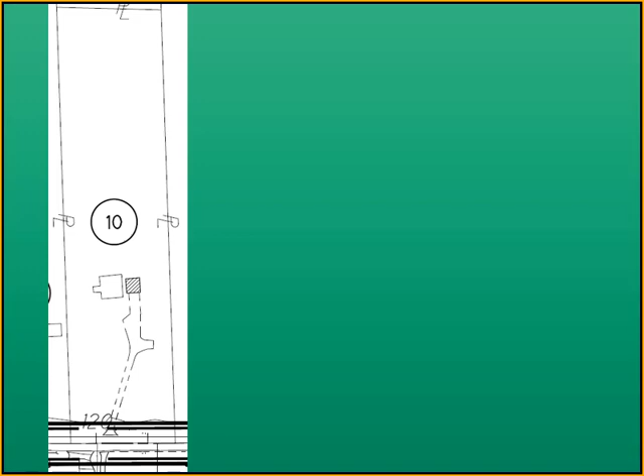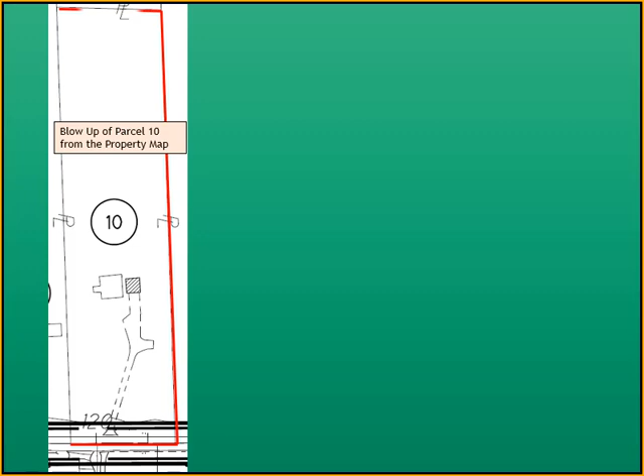What we're looking at right now is from the property map, and it's a blow up of parcel 10. I've just drawn a red arrow, and that shows that the Riebe's property extends into the middle of State Route 87. The red lines outline the remaining rest of the Riebe property.

I've just inserted a yellow highlighted area, which is detailing the SH taking and the T taking from the Riebe property.

So now we're going to illustrate the SH and T take areas because it's difficult to see on the blow up.

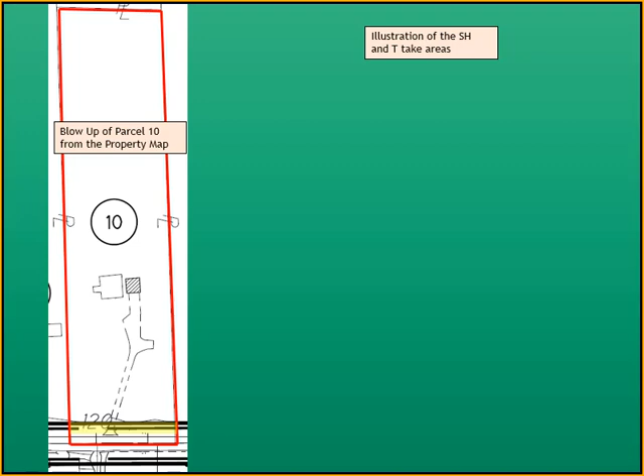Again, this red line that you see in this orange area is the property lines for the Riebe property. The center line of State Route 87 is the border of the Riebe property.

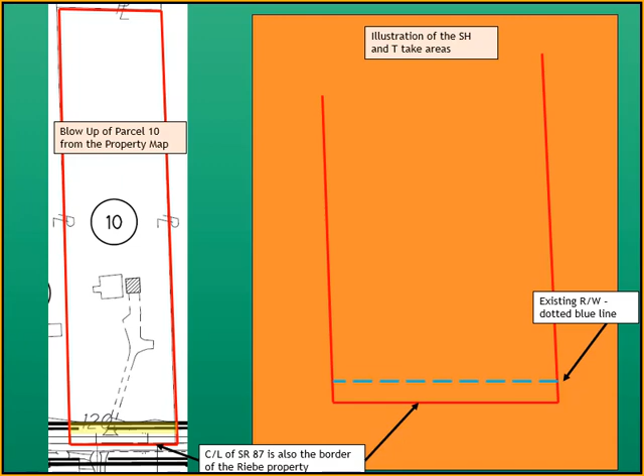The existing right-of-way is shown by dotted blue lines right here. And so the existing right-of-way is also PRO. That PRO goes from the center of State Route 87, which is owned in part by the Riebes, and it stops where the existing right-of-way line is, shown by the blue line. That is existing PRO, existing right-of-way.

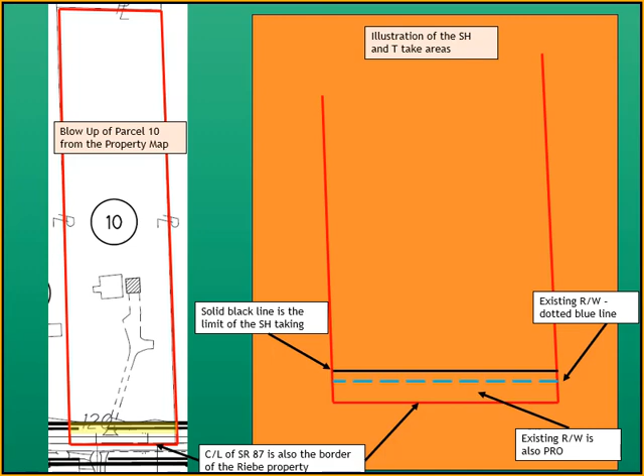Solid black line is going to be the limit of the new SH taking. And the T, I'm drawing in the T taking right now. It's an irregular shaped line, and that is the limit of the T taking.

So let's get into the detail sheets from the right-of-way plans. The detail sheet provides enough information for an appraisal. It also serves to document exactly what area is acquired, and many of the items shown in the right-of-way detail sheets are construction items.

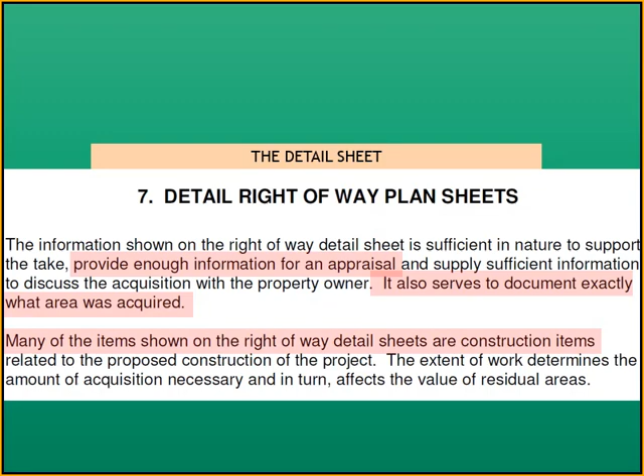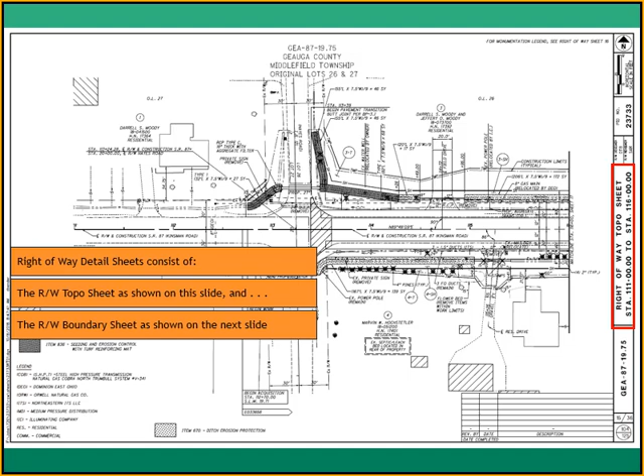So in front of you is a detail sheet. Right-of-way detail sheets consist of the right-of-way topo sheet, which is shown on this slide, and the right-of-way boundary sheet, which is going to be shown on the next slide.

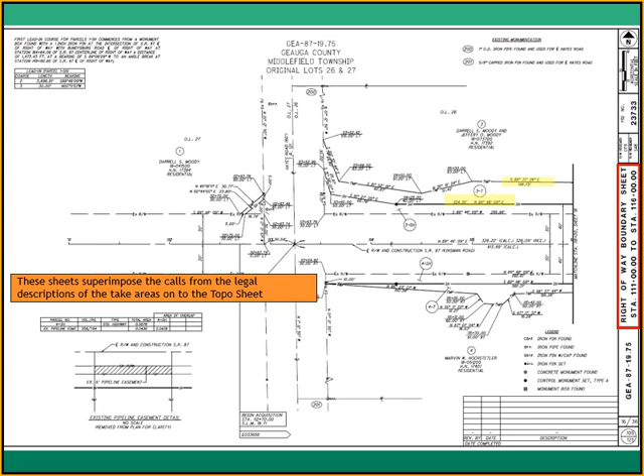And here's the right-of-way boundary sheet. These sheets superimpose the calls from the legal descriptions of the take areas onto the topo sheet. So outlined in yellow are the various legal calls for this particular parcel.

So now let's take a more detailed look at the detail sheets for parcel 10 on the next few slides. We're going to interpret a detail sheet. Here's a blow up of that detail sheet.

Outlined in red squares are property lines which go to the center of State Route 87. So the Rybys, we've just outlined parcel 10. We're going to go down State Route 87. Here's another property line.

And that's across the street from Rybys is parcel 11. There's another property line; we've just outlined that property line, and that's owned parcel 12. Here's another property line; outlined that, and that's owned by parcel 14. To the north is a larger parcel, parcel 13.

So what we're drawing in now is the existing right-of-way line, outlined in a brown square. We're going to draw those in with a dotted red line. And then below, we are now drawing in the existing right-of-way lines. We're putting in a red dotted line to represent where the limits of the existing right-of-way lines are. And that yellow highlighted area is the limit of the existing right-of-way for State Route 87 in the vicinity of the Riebe property. That is PRO.

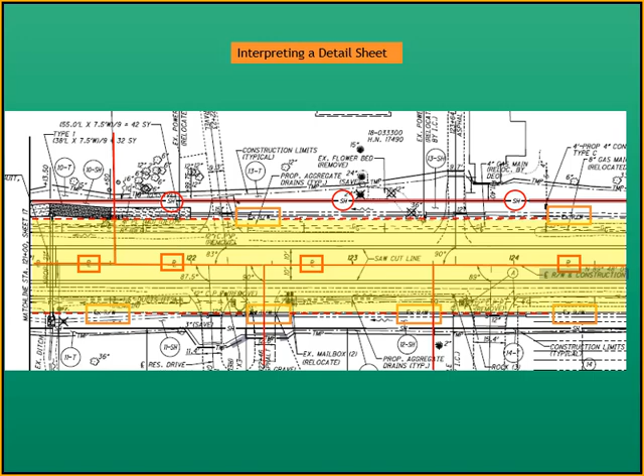Now we're drawing in circles that are designating where the new SH taking line is. Notice it's a solid black line to the upper part of your screen. We're going to draw those in a pink color. So that is the limit of the SH taking that goes from the limit of the existing right-of-way, shown by a dotted red line, going up to a solid black line outlined in pink. That will be the limit of your new SH taking.

We're now going to go to the bottom of the screen, show the limits of the new SH taking, also outlined in pink.

So now we're going to go to the top of the screen. In circles, we're going to outline the limits of the T take areas. So those are showing the T take areas outlined in a black circle. And now we're going to outline those in a gray color.

So the T takings occur behind the new SH taking. Those T takings are needed for construction purposes associated with the highway. Those T takings will expire at the end of the project. Those T takings are for 12 months based on the right-of-way plans. We're now going to go to the bottom of the screen, outline the T take areas.

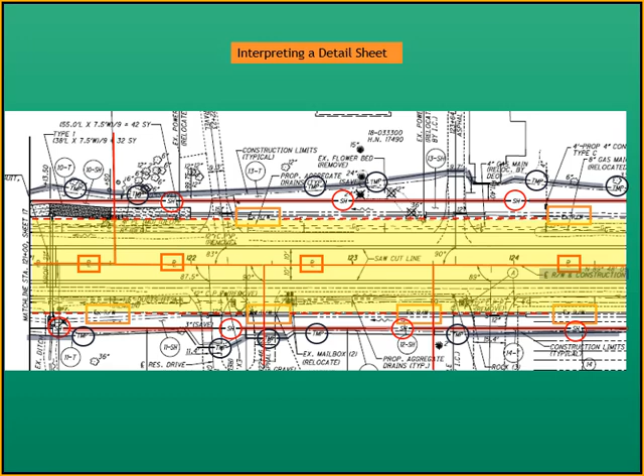And we're going to highlight those with a gray highlight. All right, next slide. We're going to look at the detail sheet having parcel number 10. There's parcel 10 in a blue highlight to the right of your screen.

Here is the property line for the Riebe property going to the center of the road, but it doesn't show the entirety of Riebe property because there's a match sheet.

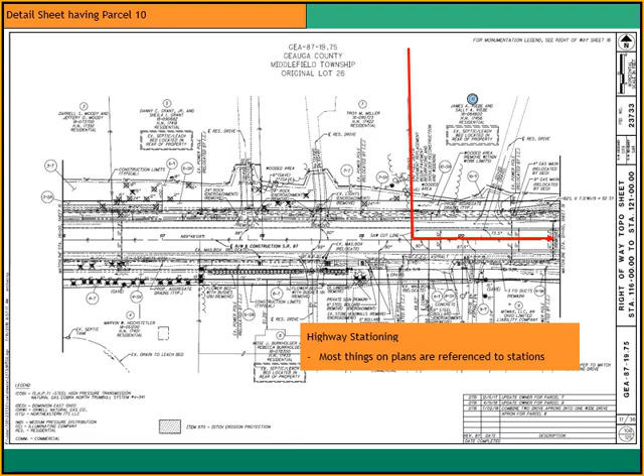Highway stationing, you need to be aware of. Most things on our highway plans are referenced to highway stations. So outlined in a brown square is a highway station. In this case, it's 117. Going up station is 118, 119, 120, which happens to be in front of the Riebe property. These stations are 100 feet apart.

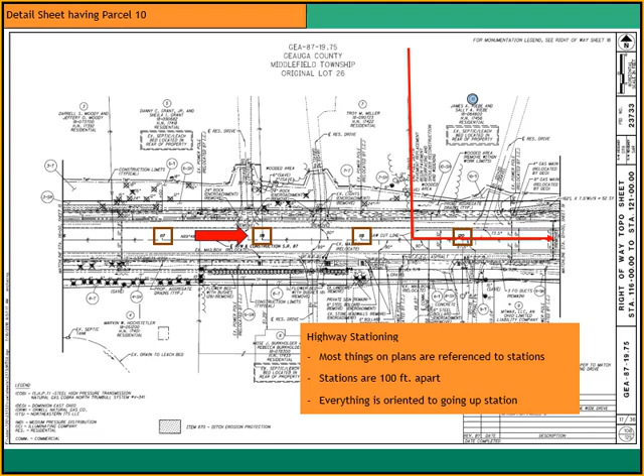Everything is oriented to going up station. So from station 117 to station 118, that is going up station, shown by the red arrow. To the left is going to be station left. To the right will be station right. And the arrow going to the left is going to be known as down station.

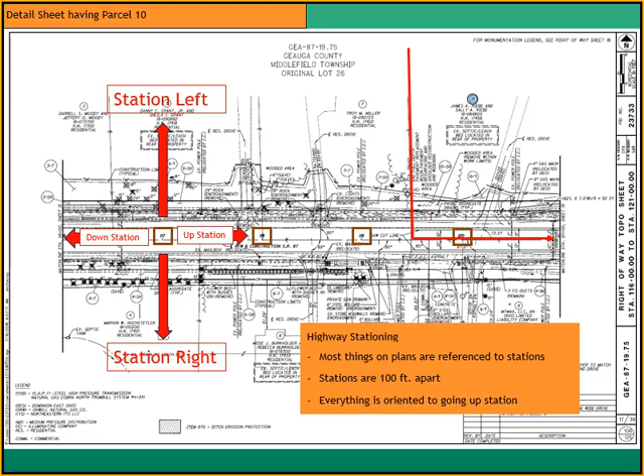And outlined in red is the match line to show the entirety of parcel 10. We've just outlined parcel 10-SH, which is the SH taking, and parcel 10T, which is the T taking.

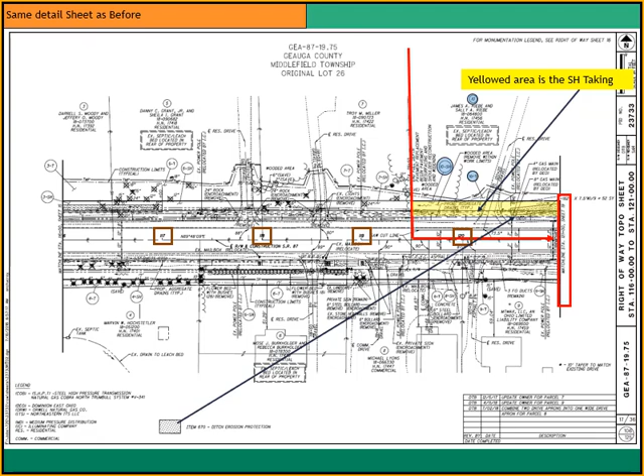The yellowed area is the SH taking, and here is that yellowed area right here. And within that yellowed area are construction features. In this case, it's a ditch erosion protection shown as a dotted area. And you can see where it's at outlined in yellow in the SH taking.

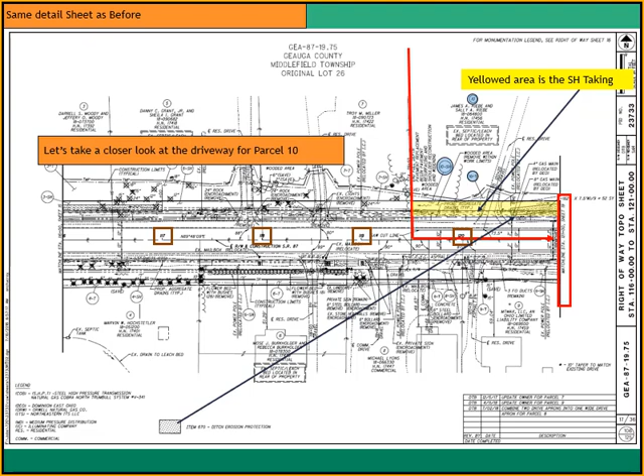Let's take a closer look at the driveway for parcel 10. Here's the blow up. The existing driveway is located at station 120 plus 20. We know that because it's denoted on the plans. So there is station 120, and so we go up station 20 feet, and that will be the center line of the driveway. Right there's the center line of the driveway.

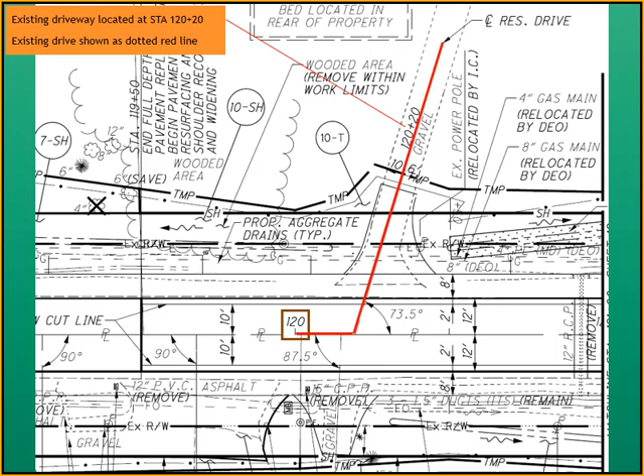The existing driveway is going to be shown as a dotted red line. So we're going to draw that in for you right now. All right, that is where the existing driveway is located at.

Now, this project is going to put in a new driveway, and it's going to be a solid blue line, and we're going to show you that right now. So you can see where the new driveway is in relationship to the existing driveway.

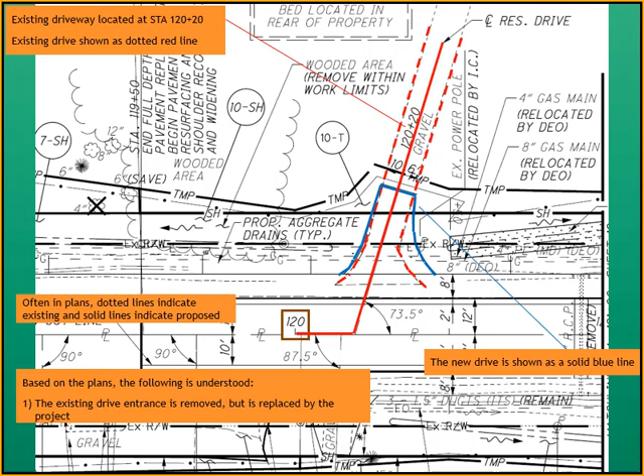Often in plans, dotted lines indicate existing and solid lines indicate proposed. Based on the plans, the following is understood: the existing drive entrance is removed but is replaced by the project. The newer drive entrance is slightly wider than the existing drive entrance.

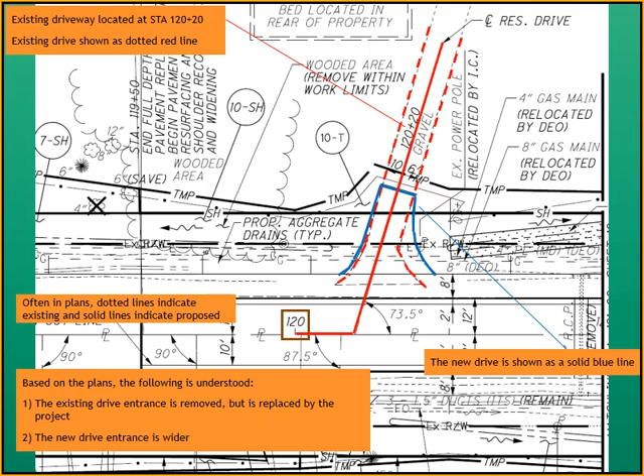So now let's look at the match sheet to parcel number 10. Here's the match sheet. Here's parcel 10 continued. This is the match line to the other plan sheet we were looking at.

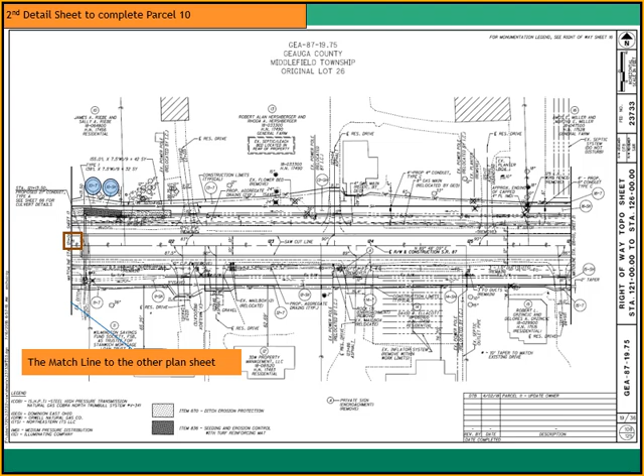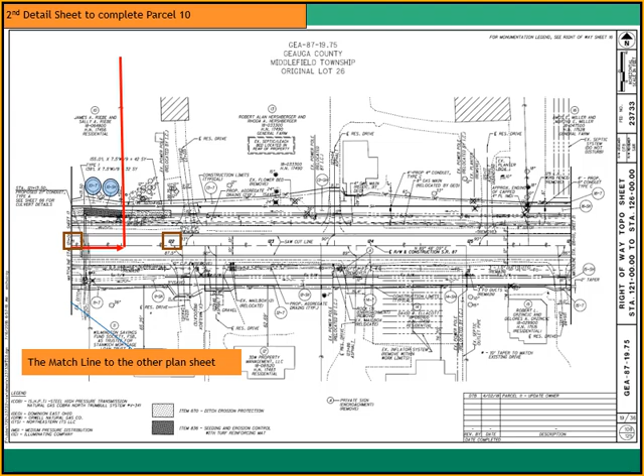And these are highway stations that are in the vicinity of the Riebe property. So we go from the highway station in an easterly direction, and there's the easterly property line for the Riebe property.

So let's expand parcel 10, take a better look. Okay, here's the blow up. Here's highway station 121. There is the southerly border of the Riebe property, parcel 10, goes to the center of State Route 87, and there is the easterly property line for the Riebe property.

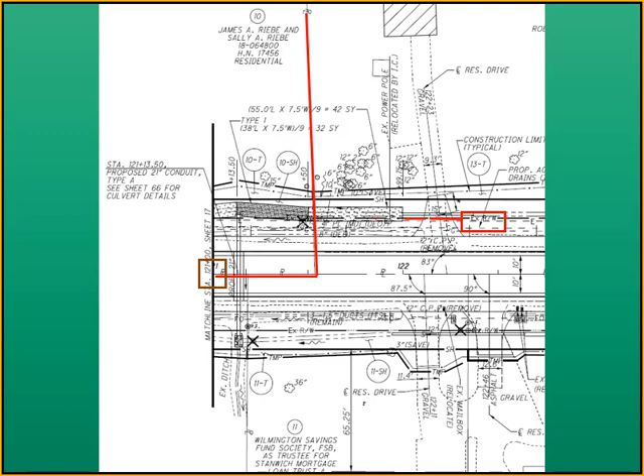There is the existing right-of-way outlined in a square red box, and we are drawing in the existing right-of-way right now as a solid red line. The yellowed area that we've highlighted here is the SH taking. And there it is.

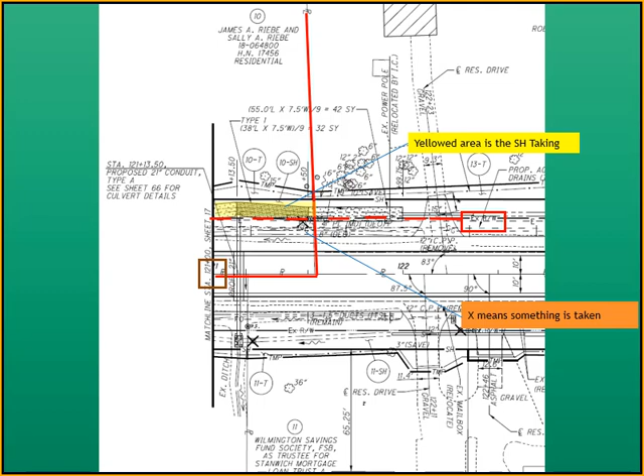So there is an X, and that means something. Right there is the X, means something's taken. In this case, it's a tree. The shaded areas are ditch erosion improvements. So there is the shaded area there.

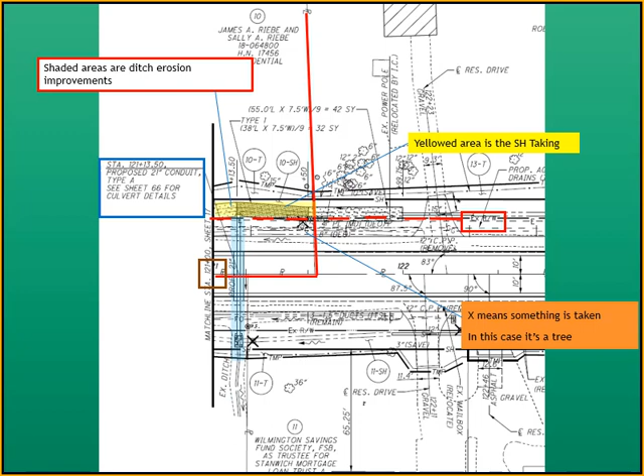And here's another notation. At station 121 plus 1350 is a proposed 21-inch conduit. And we've outlined or highlighted that in blue. So we know that the project is going to install a new conduit in the vicinity of the Riebe property.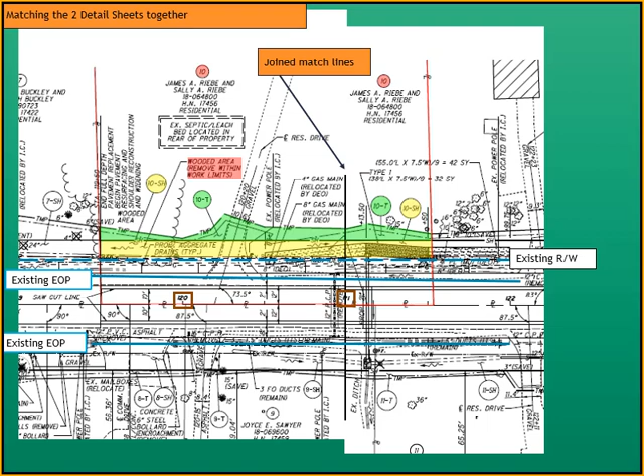We're now showing you the highway station. In the vicinity of the Riebe property, we've got highway station 120, highway station 121. And we're going to take a more detailed look at what's going on in the take areas of parcel 10.

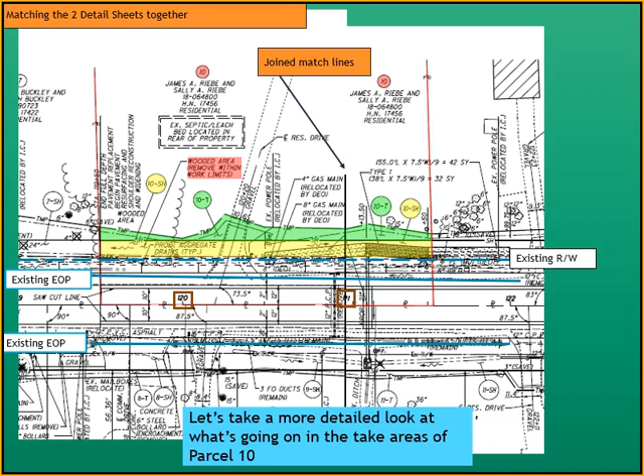Here's a blow up. The right-of-way plans show us, outlined in red here, that the existing septic and leach field are located to the rear of the property, so they are not in the vicinity of the take areas. We're not impacting the septic system.

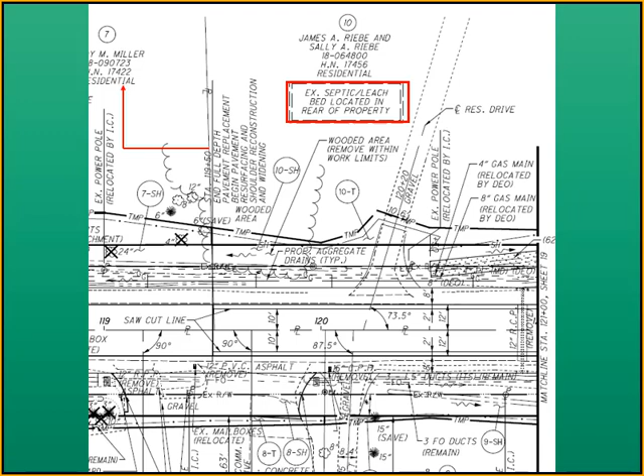We're drawing an arrow here because there is something denoted on the plans. It's written vertically, so it's difficult to read. It says, end full depth pavement replacement, begin pavement resurfacing and shoulder reconstruction and widening.

So we know that at the Riebe property, something is happening construction-wise. They're going to stop the pavement removal, which is a full depth replacement, to the left of the Riebe property, and starting at the Riebe property and going easterly is going to begin just the resurfacing aspect and the shoulder reconstruction of the project. That's at that location right there.

We're going to show you the edge of existing pavement, which is a dotted line right here, and we're going to show you the edge of new pavement as a solid blue line right here. Those things are aligned at the driveway entrance to the Riebe property.

We're now going to show you the construction limits that are going to happen within the SH area and also the T area that's going to be taken. Those are going to be shown as a red line. Those are the construction limits of the project.

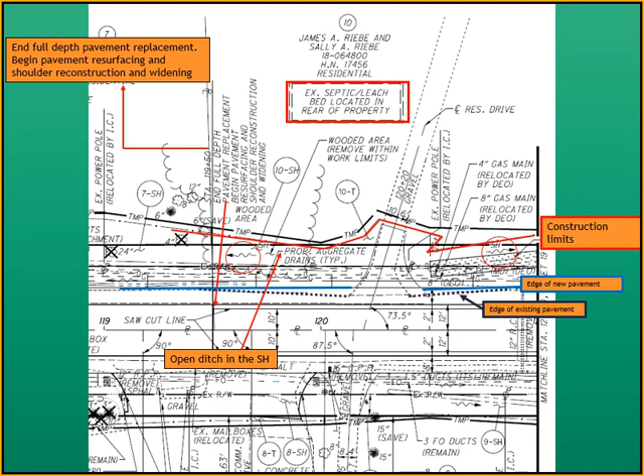There is an open ditch in the SH area. Notice that in that open ditch, I'm drawing a circle around squiggly lines with an arrow. That is the direction of the water flow. Notice that on the left, the water is flowing westerly, and on the right, the water is flowing easterly. Therefore, the new driveway is going to affect the directional flow of water into the ditch.

There's a wooded area that extends into the SH and T takings, and that wooded area is those squiggly lines we talked about earlier when we were on the title sheet of the right-of-way plans.

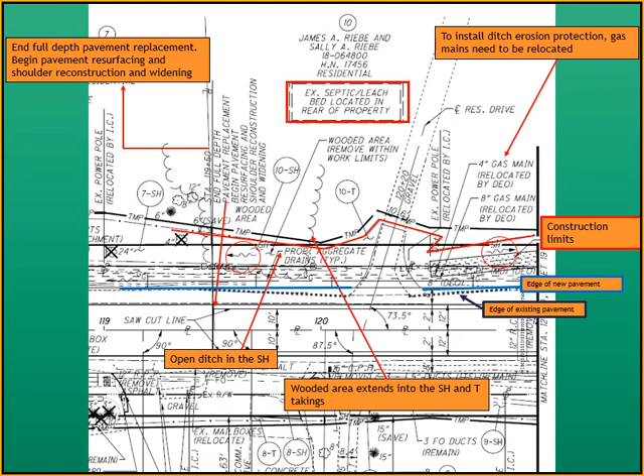To install ditch erosion protection, gas mains need to be relocated. The plans denote that information right there.

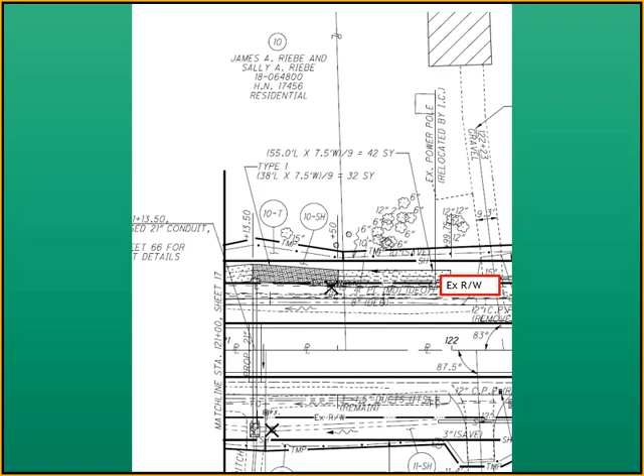All right, so now we're at the match line to the other portion of the Riebe property. We're going to show the existing right-of-way limits. We notice that there is a tree taken within the SH area right there.

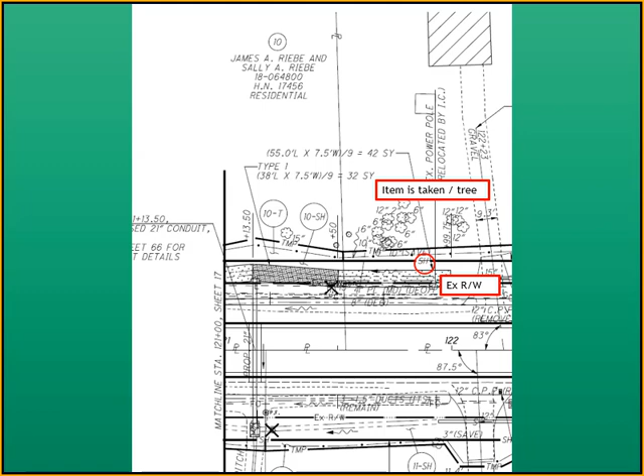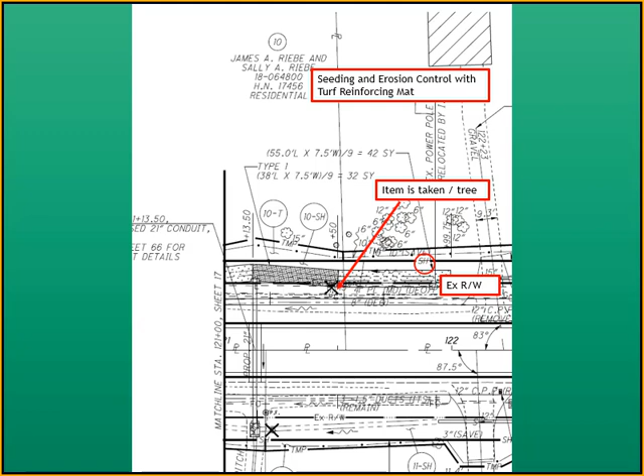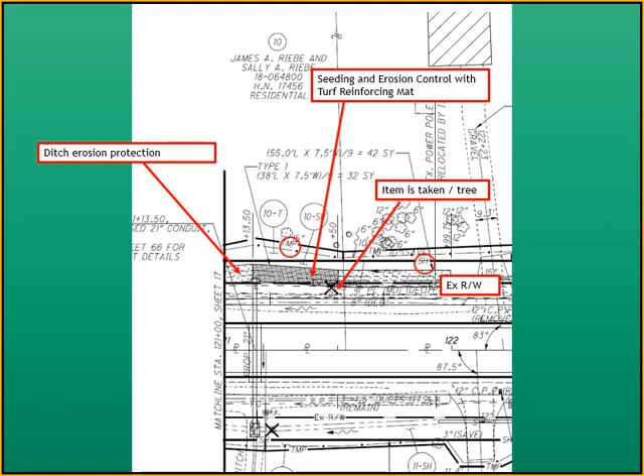We also note that the plans are showing seeding and erosion control with turf reinforcing matting are going to happen in the new SH take area. Ditch erosion protection is denoted by those dotted lines. And we're showing you a circle showing the limits of the T taking from the Riebe property.

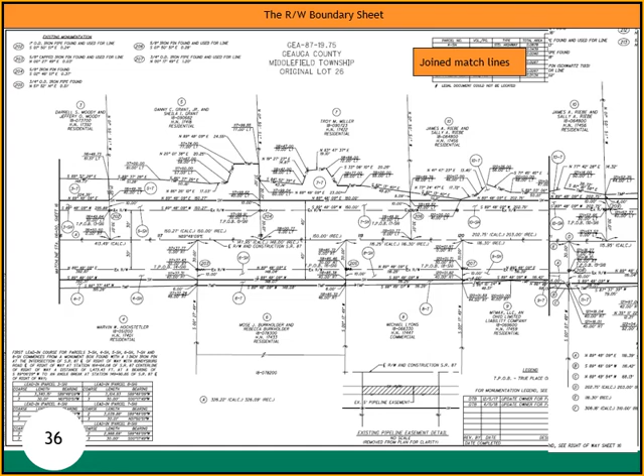And we're outlining the Riebe property right now, so you can see the entirety of the Riebe property on the boundary sheet map portion of the right-of-way plans.

There's parcel SH. Drawn another circle. We know that that is a 10-foot wide taking from the entire frontage of the Riebe property. It's 202.75 feet long. That yellow shows the SH taking. So the SH area is 10 foot wide by 202.75 feet long.

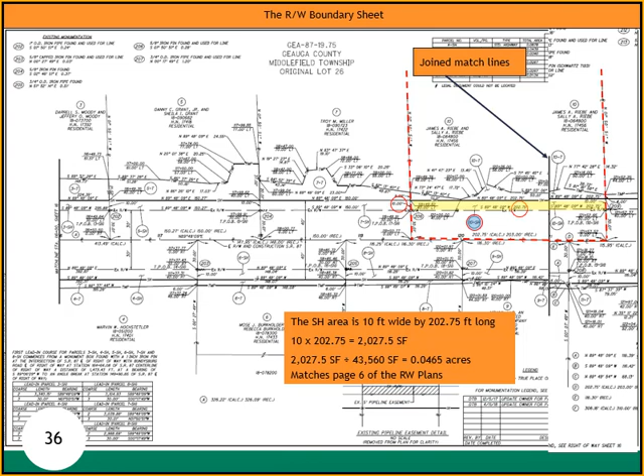That math means it's 2,027.5 square feet. And if we divide that by the square footage in an acre, 43,560 square feet, we know that the SH taking contains 0.0465 acres, and that matches with page 6 of the right-of-way plans.

We've just shown you the T area. The T is very irregular in shape. At its deepest, it's approximately 16 foot deep. The summary sheet details the T taking as containing

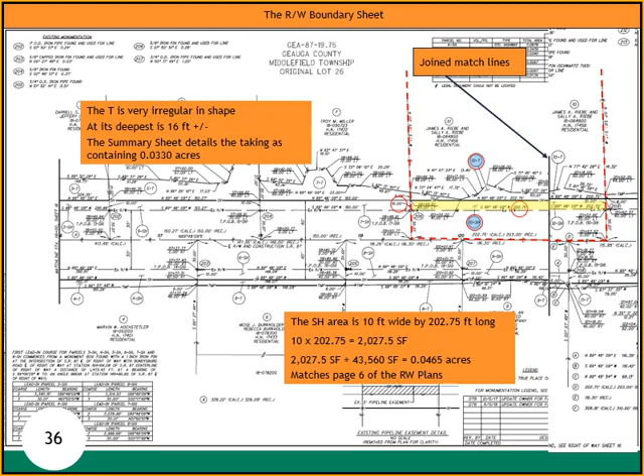0.0330 acres. All right, it is now time for a knowledge check.